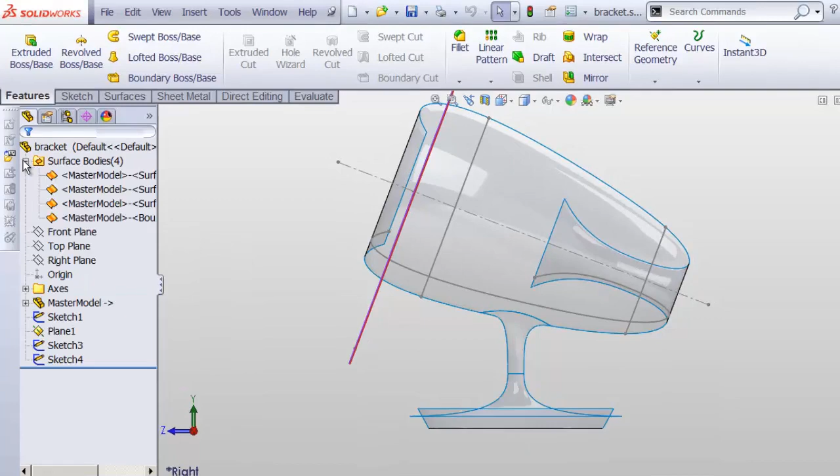So what we can do is go up to our surface bodies here and select a few surface bodies. Let's select the ones that we know that we don't need. Let's see, it's these ones down here, all these base ones. And then I'll hit the delete key on my keyboard, not backspace, but delete. And when I do that, it's going to create a feature for me called delete body. And I hit OK. And that's just a feature in my tree that removes surface bodies from the part.

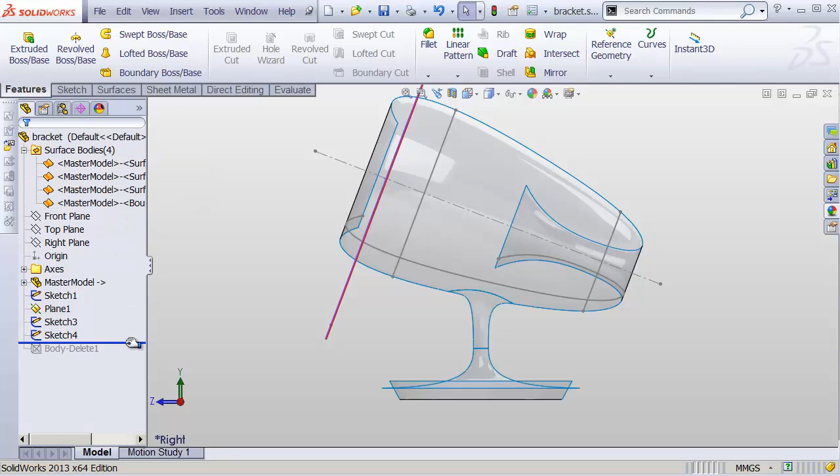Now, obviously, those bodies are still existing in my file. If I roll back before the body delete, they come back. Okay, so this is just a handy feature to help us clean up what's going on in our file. And just so that you know, up in the Direct Editing tab is a Delete Solid/Surface tool, which is the exact same thing as what we just did using the delete key.

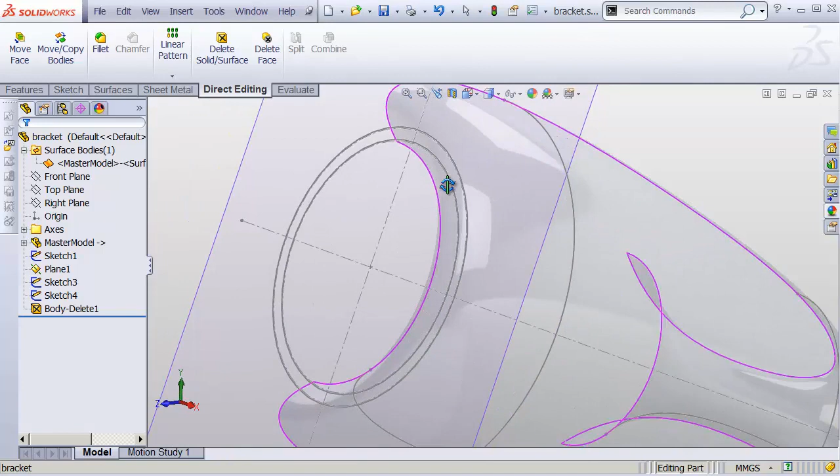Okay, so this stuff is here just as a reference, but for the moment, let's actually go ahead and create just something as a stand-in for our bracket. I'm going to go to my Features tab, do an extruded boss with the outer diameter. We'll go the opposite direction and pick your favorite wall thickness. Let's just say it's 3 millimeters, just because who knows what this is made of. This is just a stand-in anyway. And hit OK. That'll be our first solid.

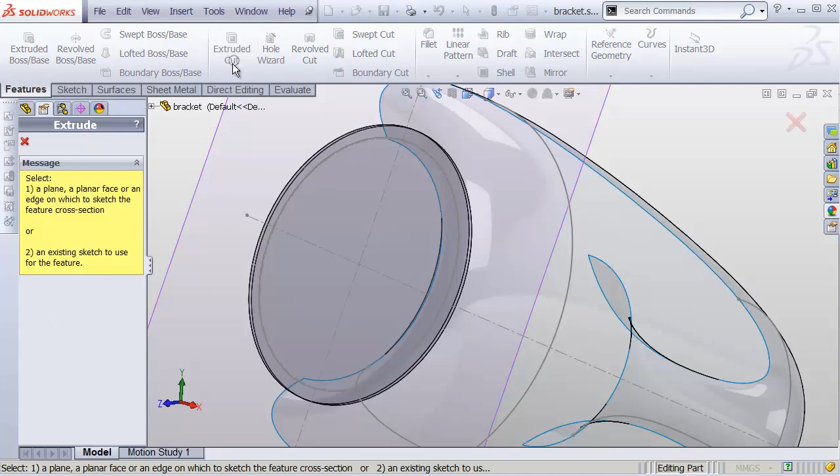Next, we're going to need a hole in the middle of this, right? So let's do an extruded cut using our inner diameter sketch right there. And instead of blind, let's go through all, just to be sure that it goes through everything in our part. Hit OK. And we have the beginnings of a bracket. And I'd like for the outside of this to rise up toward the front.

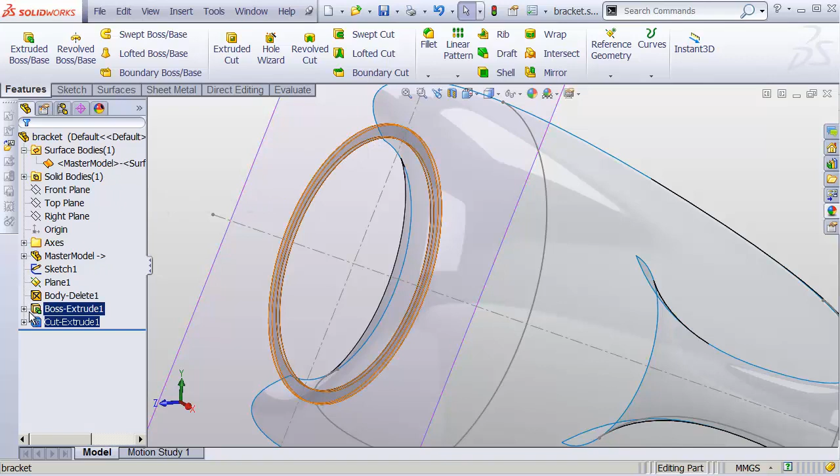So let's grab that original outer diameter sketch, head up to Extruded Boss, and this time, instead of just extruding a big chunk, we're going to come down here to the Thin Feature checkbox and check it. And we want one direction, and make sure that it's going outward from our sketch. And let's make it, again, 3 millimeters thick.

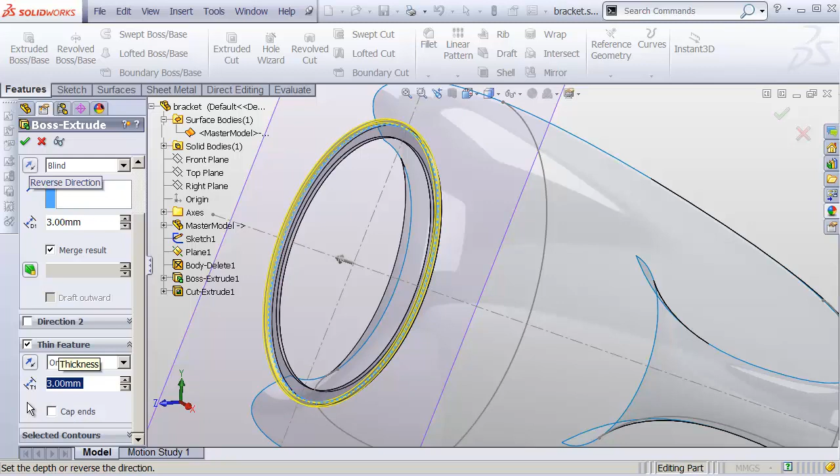Now, in direction 1, we'll make that go down by a certain amount, by the same amount as our thickness. So it goes down the exact same as the previous extrude that we did. And then in direction 2, we'll come up however far we want for this flange to come up. And let's say we want that to be 10 millimeters. I'm just guessing. We'll hit OK. And that works for the moment.

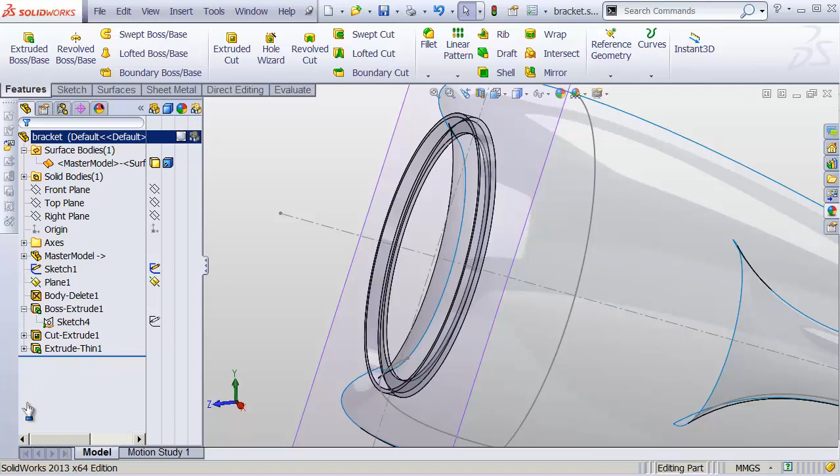And at this point, the fact that this is ghosted is starting to kind of bother me. So let's expand this little arrow right up here to see the visibility properties of our various features and bodies. And you'll notice that the bracket part is currently ghosted. It's currently in transparent mode. Let's click on that to make it opaque again.

And then I do want for this surface to be transparent, so we'll use those handy-dandy presets that I created before. Go to my appearances and the materials, the ones that I've created. Go ahead and make that, I don't know, green, doesn't matter. And there she is. So this is going to be our basic bracket. This is our starting point.

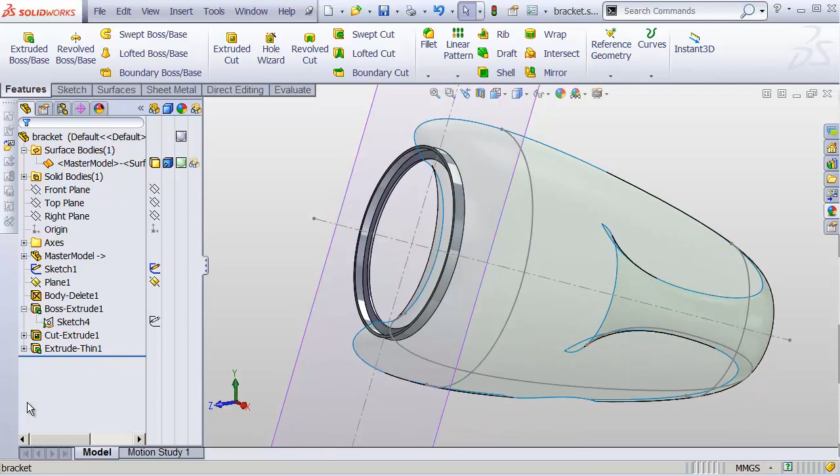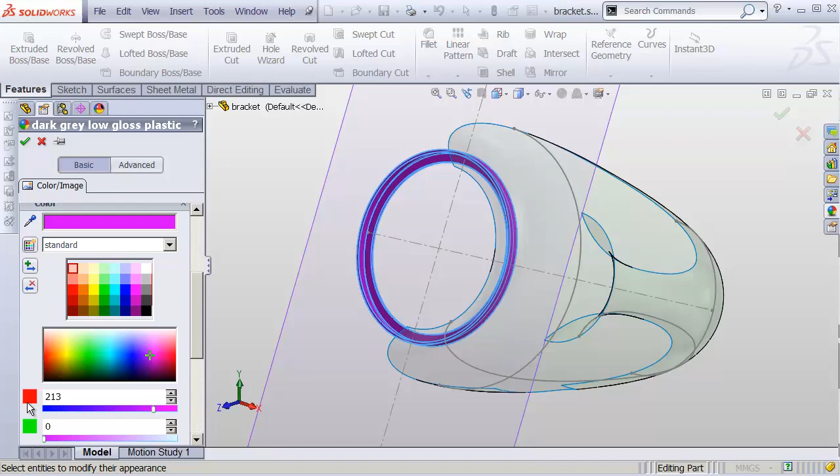And before we go back, let's also grab another material. This time, let's grab this dark gray and apply it to that body. But then click the body, grab its appearance, and edit that appearance. And then I'm just going to make it something really obvious, like a nice bright purple, something that's really easy to see. Hit OK. So that's going to be really obvious back in our assembly.

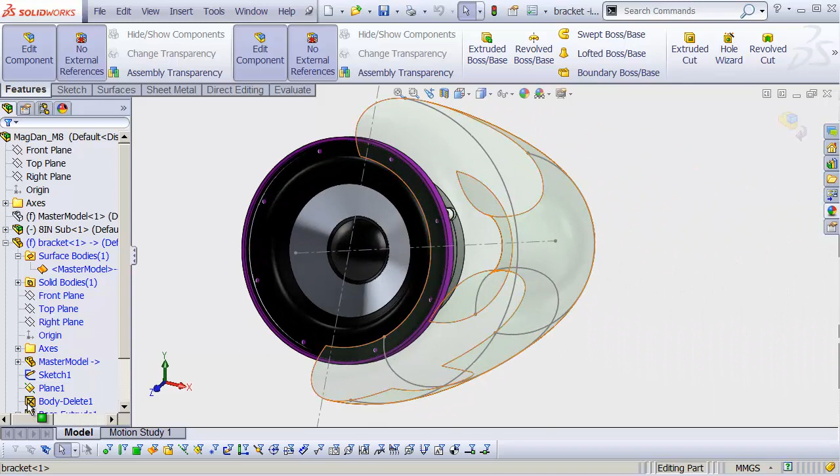We'll go back, save that, and here in our assembly you can see our big purple bracket is nicely containing the outside of our transducer. Perfect. Now we're going to need more to this bracket, obviously. It's going to have to connect with the rest of this body. Further, we're going to need screw holes in order to accommodate the actual transducer. So let's do that in a separate video.